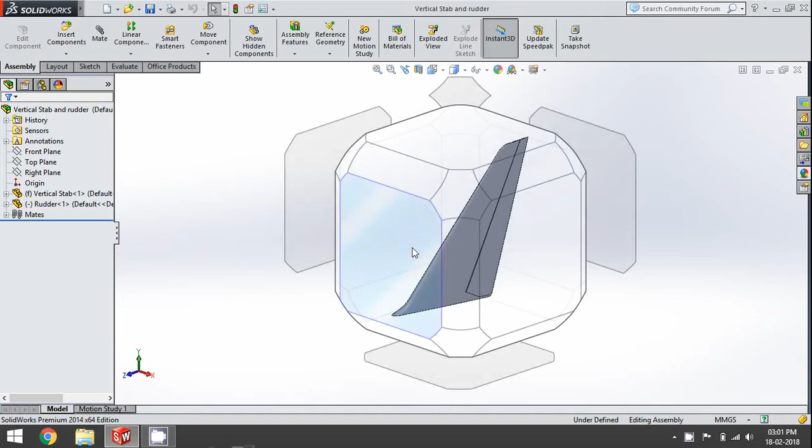Hello guys, in this video let's talk about how to make the control surfaces of an aircraft. For this video I'm gonna use the vertical stabilizer and rudder assembly to show you how to make the control surface. And the reason why I'm using this particular control surface here is because it is the simplest, as it doesn't follow any complicated profile since it's a vertical profile. And that's pretty much it.

And all the other control surfaces, like on the wing or on the elevator or anywhere else on the aircraft, can be made by the same method that we use here. Usually the problem with making control surfaces is that we won't be able to get a perfectly lined up seam at the point where the rudder or the control surface actually meets the parent surface of the aircraft.

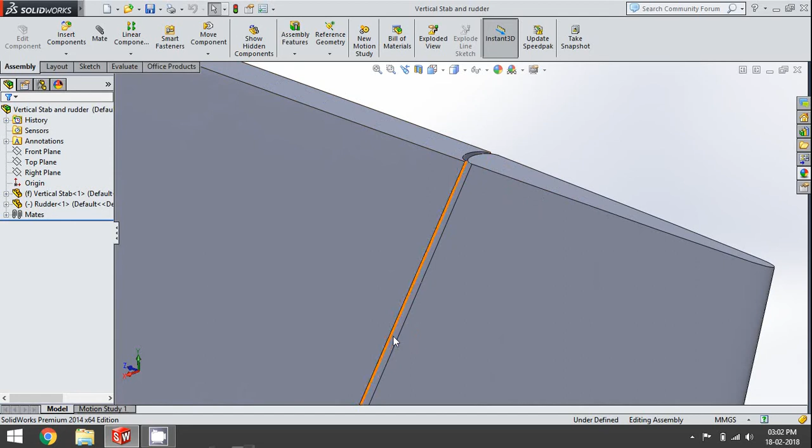So as you can see here, the seam throughout the control surface is almost perfect. It is not changing, or it is not having big gaps or anything in between there. And also, as you can see, when I move the control surface, the seam pretty much stays the same. So let's see how we can make this.

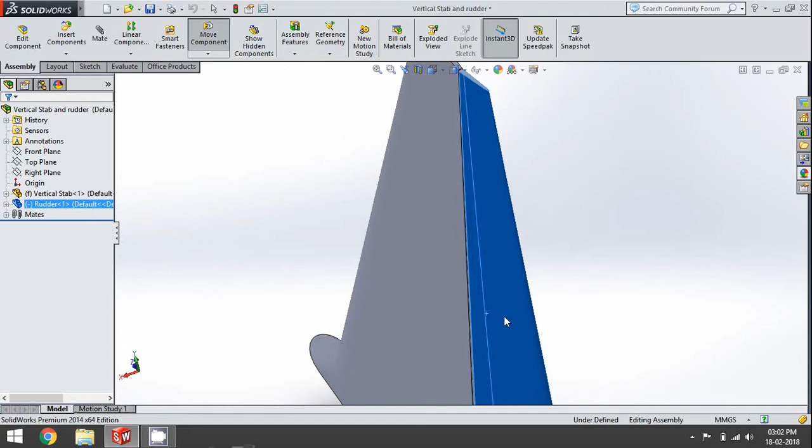So I have already made the vertical stab over here, and before you do anything to this part, make sure that you make another copy of this vertical stab, the exact copy of this part. So I made an exact copy and I named it rudder, and this is what I've opened in SolidWorks right now. So the first thing that we have to do is sketch out the portion that we have to cut out of this vertical stab.

For that, I have taken a picture of the A380 as a reference. So as you can see, the rudder itself is divided into two parts, but we're not going to do that. We're just going to make the rudder as a single part. So the profile comes from here, it goes straight down, but it does not go to the fuselage itself. It stops kind of like 2 feet away from the fuselage, or 1 foot, I'm not sure, and it makes an angle as it goes down and meets the fuselage.

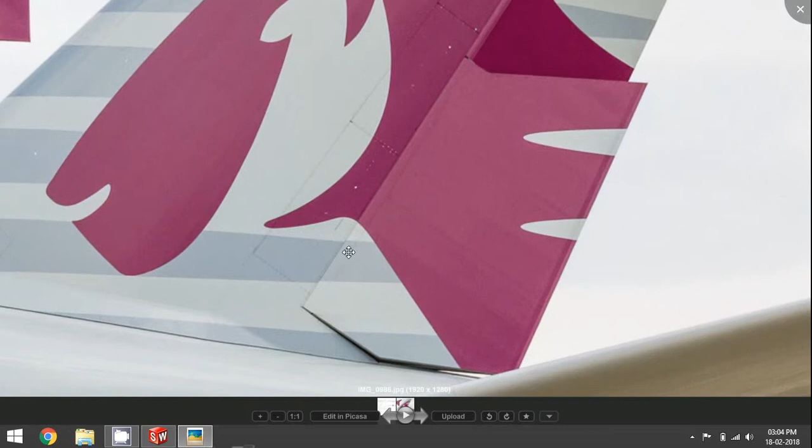And note the other thing here, the angle that this line and this line make is 90 degrees. That means we can say that this line over here or somewhere in there is the pivot point. So we're gonna do that right now. So we are gonna sketch an image over here as a reference for cutting the rudder off.

And there you go. I have already sketched out the part that we have to cut, and we can see that I have made a sketch throughout the entire part, and also a sketch that kind of shows us where the rudder is going to be. So this portion is going to be the rudder, and this is going to be the vertical stab. And make sure you draw both these sections in this one sketch itself, because we will need it for the other part too.

And before you do any cutting or anything, let's do a small thing here. Remember the thing that I talked about, the seam gap being even throughout the rudder, and that is because I made a small gap over here when I made the cut. And since the vertical stab's thickness increases as we go down from the top, we have to make the clearance from there to here in an increasing manner. So there should be a gradient as we go down. So this is kind of like a trial and error method.

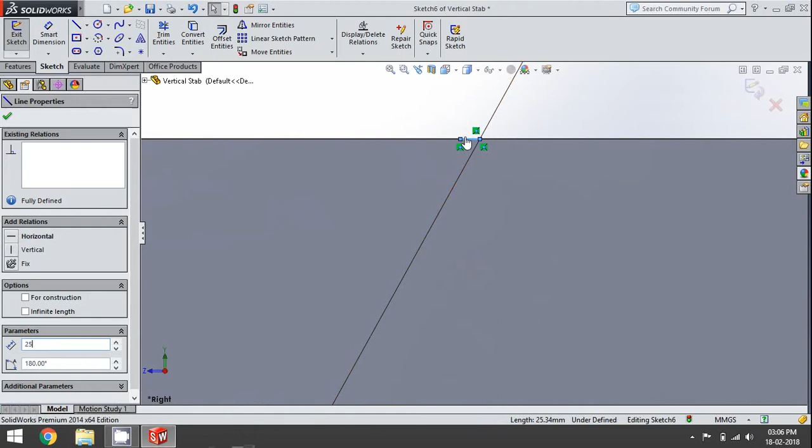So what I did is I made a small line over here that is about 25 millimeters long, and also a line here which is parallel to this line, and that line is about 100 millimeters long. And then I used this to connect this point and continue that line to here. So now we can make this a construction line, and there you go.

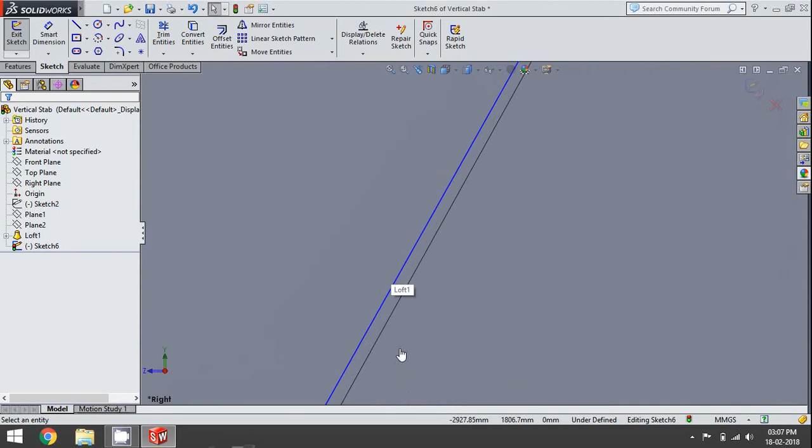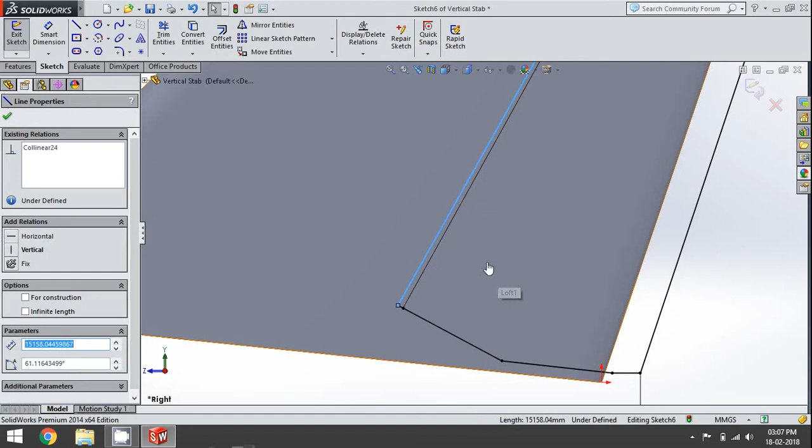So we have two lines here, the line for the gradient and this line as the pivot point, and make sure that the pivot line is always perpendicular to this line, so when the rudder rotates, it's not gonna make an angle with this whole vertical stab section. So now we're gonna use the gradient line to cut off the rudder from the vertical stab section. To do that, we just have to make this the construction line, and then we are good to go.

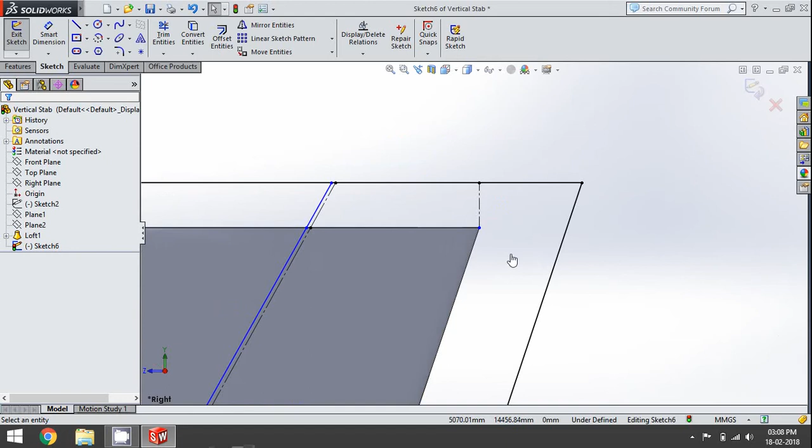Also, you can see that I made a small line here that is coinciding with the point on the very far end of the vertical stab. That is just for reference, so that when you copy this same sketch to the other file, we won't be misaligned. So let's see what's gonna happen. I'm just gonna cut it out, and I want this section to be cut out. So I'm just clicking that, and then through all. Okay, there we go.

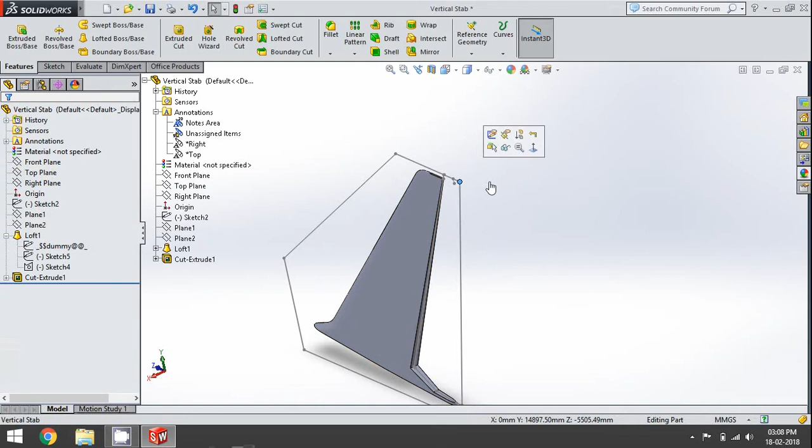So the entire rudder portion that we are gonna fix into the vertical stab is cut off. Let's hide this sketch. Now what we have to do is we have to make a pivot point there. Remember, we made a 100mm gap from this line to the pivot point, which was somewhere over there. If you take this sketch, you can see that the pivot point is here, which is not falling on this line here, but we use this section, this line, for cutting off the rudder.

So we are going to make the pivot point on this point, and before that we should make a semicircular lofted cut inside this part, so that when the rudder is fixed in there, it kind of fits in nicely and evenly without any interferences. So at first let's make that lofted cut. So for that, I'm going to start a sketch on this

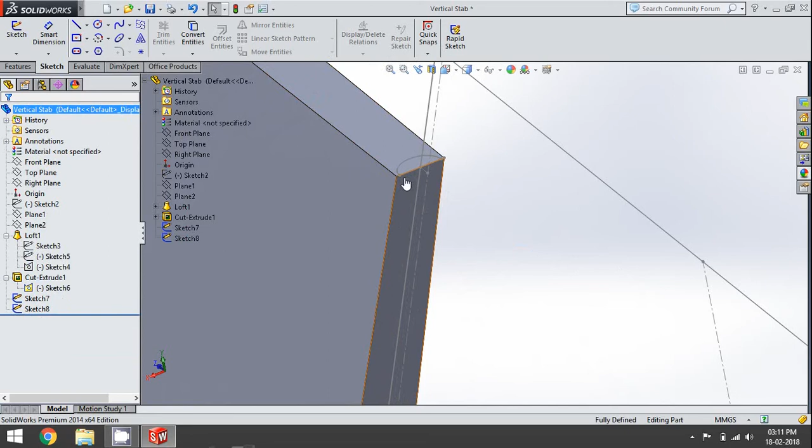plane. So I have already made the two profiles here at the bottom and at the top on this plane, and now I have to make two guide curves. So you cannot use any plane like the right plane for the guide curves, because this point and this point are in two different planes. So the lines that connect these 2 points are going to be a 3D sketch.

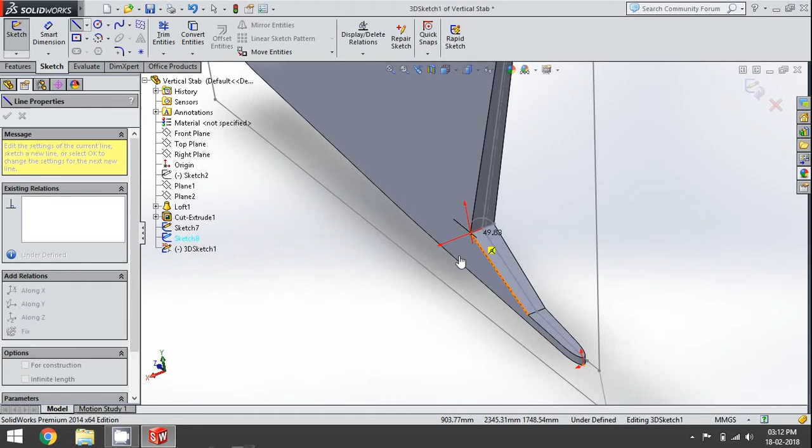So I'm just going to use the 3D sketch here, the line function, and I'm just simply going to connect those 2 points with the sketch tool here. So that point and this point over there we go. We have the first guide curve. I'm going to do that on the other side too. And there we go. We have the second guide curve ready.

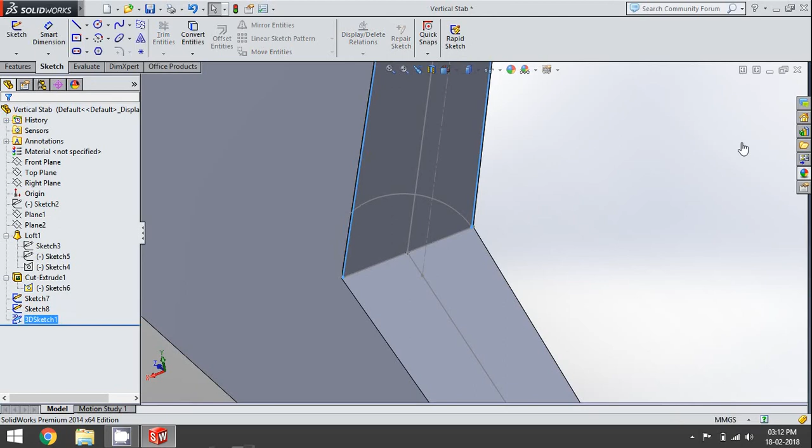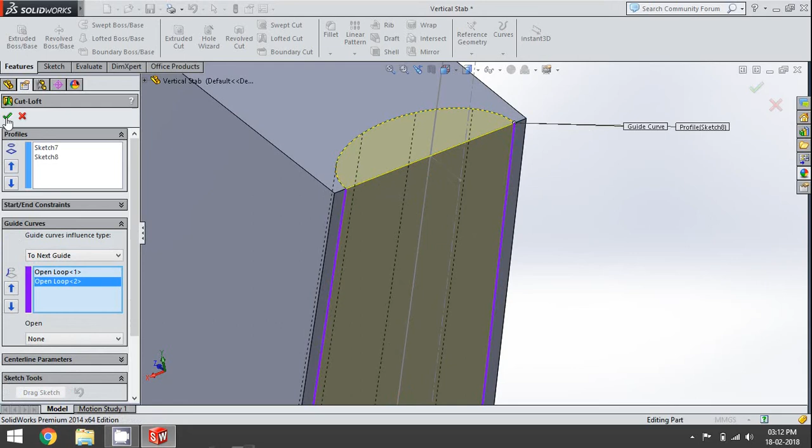Now we can do the lofted cut. So features, lofted cut, select the two profiles. Oops. The two profiles, the guide curves, and there you go. The loft is cut out, and now we have to make a pivot point. So remember, we agreed on using this point over here because this is the pivot line. So we're gonna make a small circular boss there.

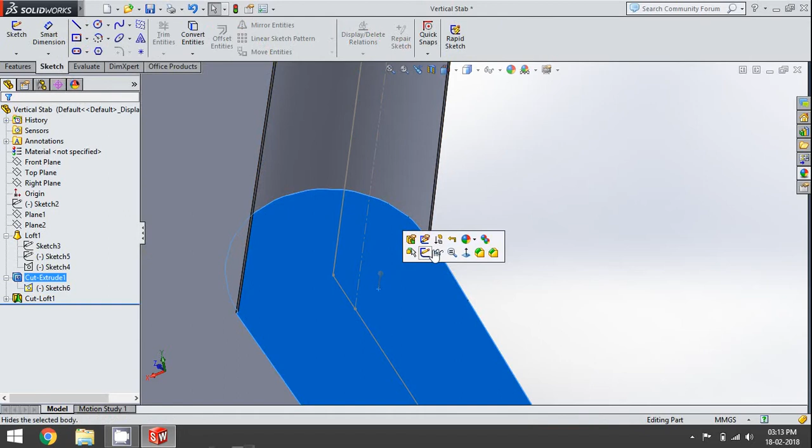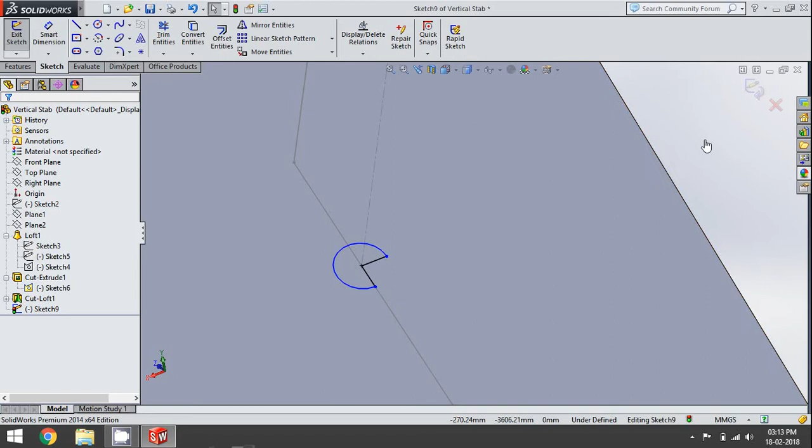Sketch, say 20mm. So it's better you cut out a quadrant before you do the boss base. This is not the way you do it in the real world. This is just for show. This has nothing to do with engineering. So I'll show you why I do that. So cut a quadrant there, and then we're gonna extrude it. So say 50 millimeters. There we go.

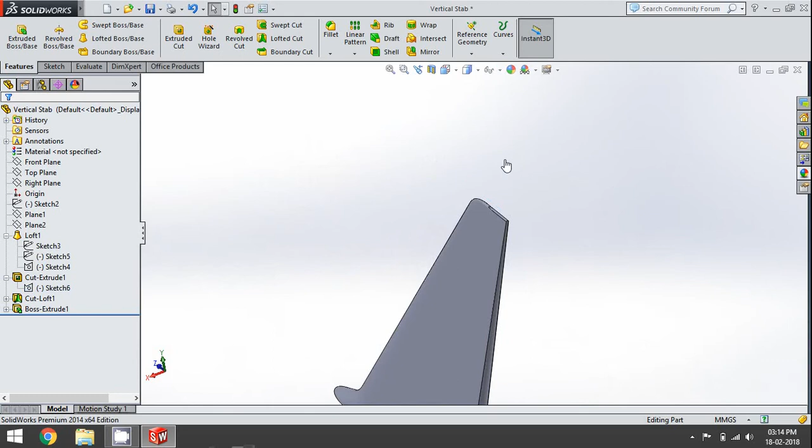And that's all that we have to do on the vertical stab. So save it, and we can close it. So before we close it, copy that. So we have that copied and close it. Now open the rudder file.

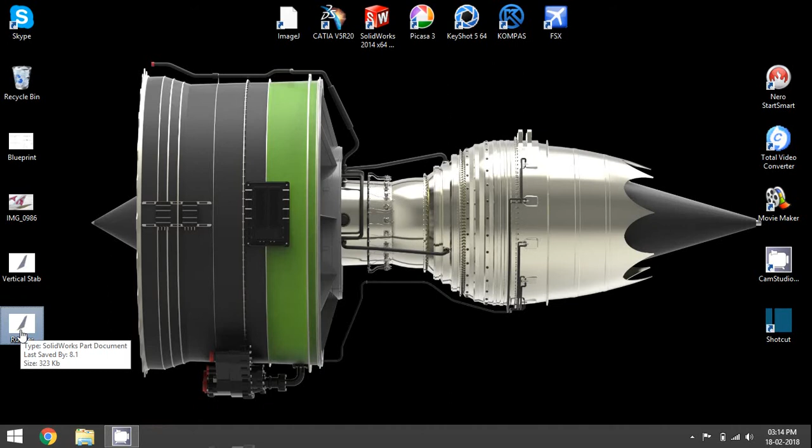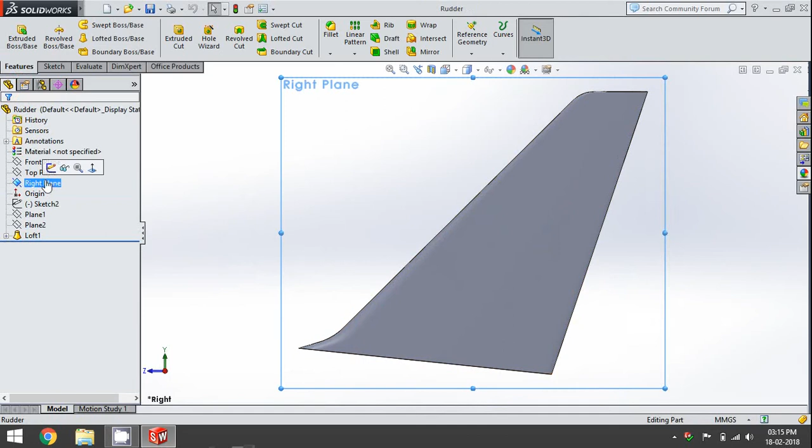So here we are gonna do the same thing, but we are gonna cut out the second portion, not the portion that we already cut out in the vertical stab file. We're gonna cut out the rest of the area. So we're gonna make a sketch on the right plane, and we have already copied the image, so paste it here, and we already agreed that this point is going to be the reference point, and that is gonna line up with this point over here, this very end. So we're going to use the convert entities to identify that line.

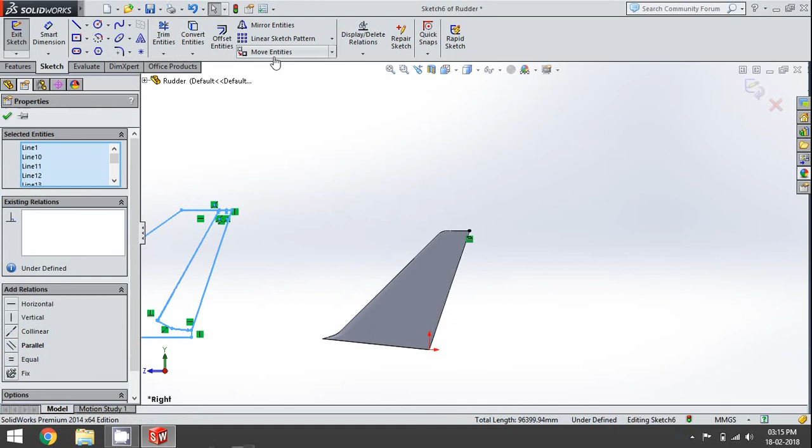So we have that point there. Now control, oops, I just missed it. So convert entities, control A, unselect that, and move entities, select this point here, and make it coincide with this very end. There we go. We have everything perfectly lined up.

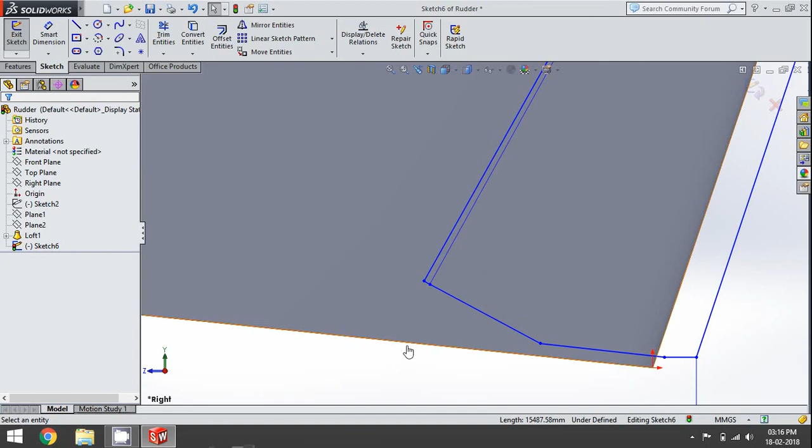Okay, so here in the previous file we used this line for cutting, but in this file we're going to use the pivot line itself for cutting, and I'll show you what's going to happen there. So we're going to convert this from a construction line into a solid line, and we're gonna convert all the other lines into a construction line. So this is a construction line now, and this one too. There we go, everything is all done.

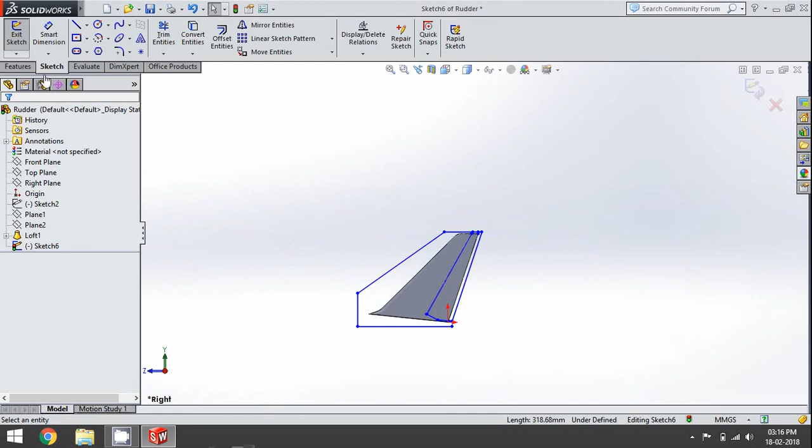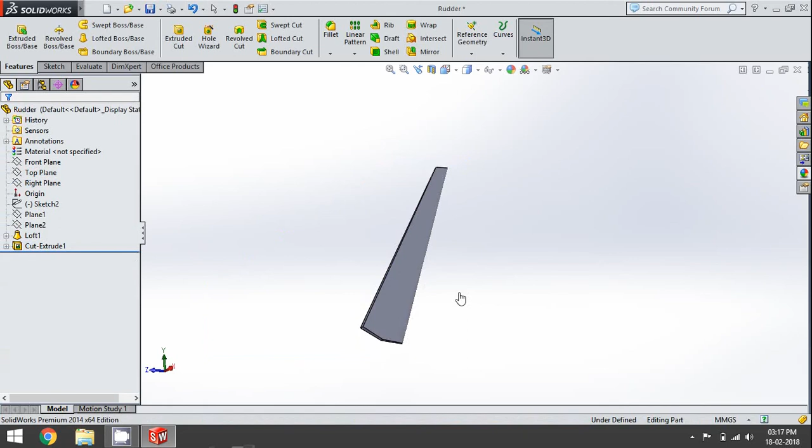Now we can just use the cut function to cut it out. So earlier we used this profile to cut out everything, and now we're going to use this one because we don't need this anymore. We need this section here, so we're going to cut out this. Through all, both, and there we go. So we have the rudder section that is ready, but again we have to do a little bit of construction or lofting over here.

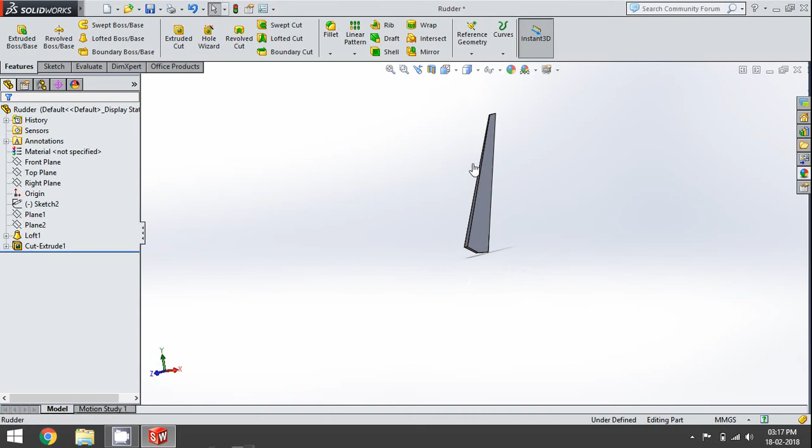So remember we made a lofted cut on the very end side of the cut on the vertical stab. So here we are going to do the opposite of that. We are going to make a loft on this very plane over here. So let's start with the sketches. So we have all the sketches and profiles and guide curves, everything ready here. The guide curves again are a 3D sketch, it's not a 2D sketch. So now we're just going to loft it.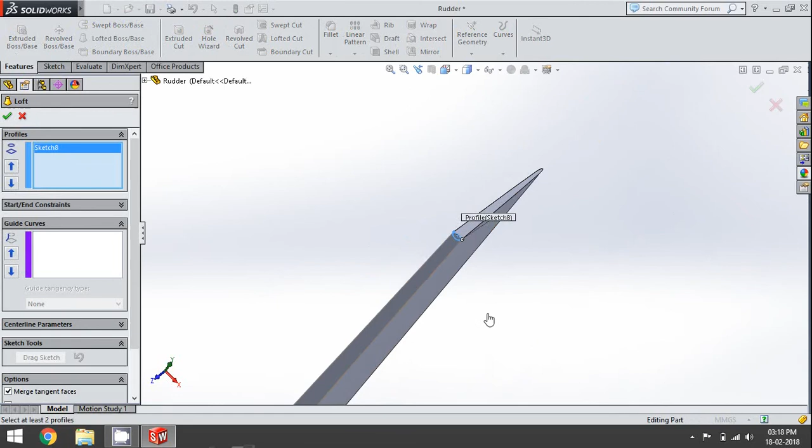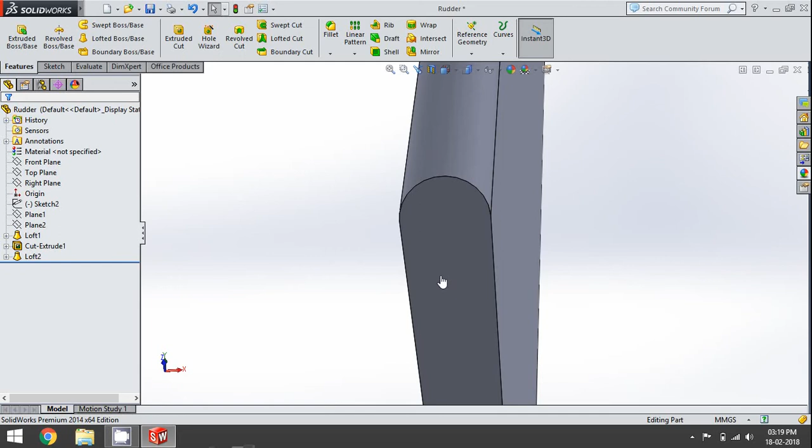There you go, the loft is ready, and now we have to make the pivot that is on the bottom here. So when we made the pivot on the vertical stab, remember we made a 100 millimeter clearance from the face of the cut. But here, since we made the cut on that pivot point, we are going to use that as the reference, using that very point where we finish the cut as the line where we're going to use the pivot point.

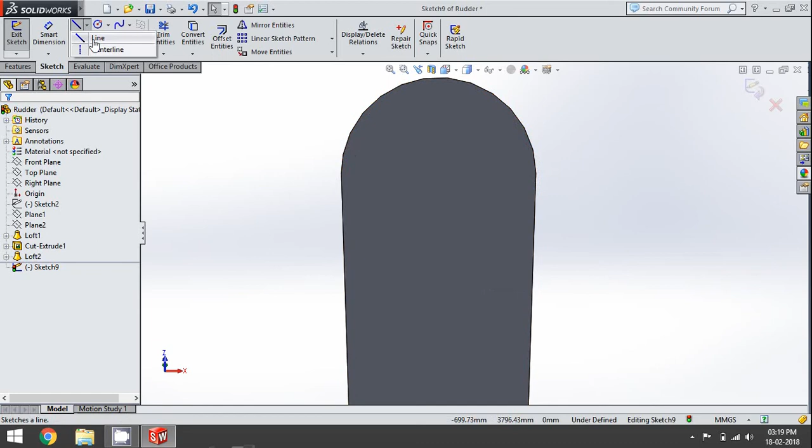So we know that this whole profile here, this whole edge that you see, is the loft. So the sketch was ended, or the part was cut from this point to this point over here, so that's where our pivot is going to be. That line is where the pivot point is going to be. So the middle of this line, again 20 millimeters.

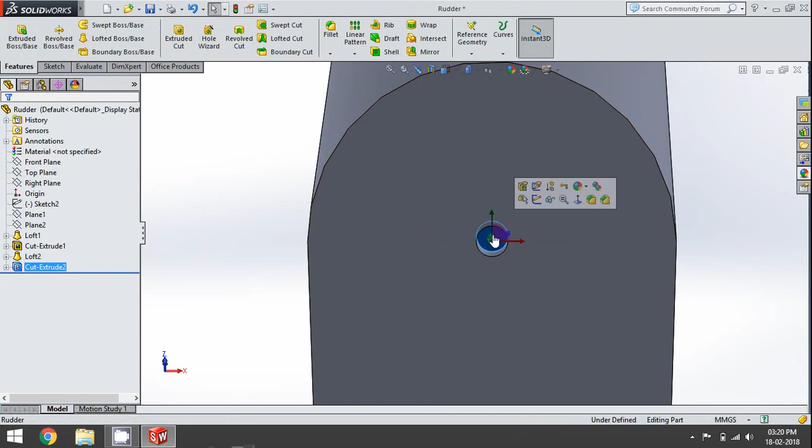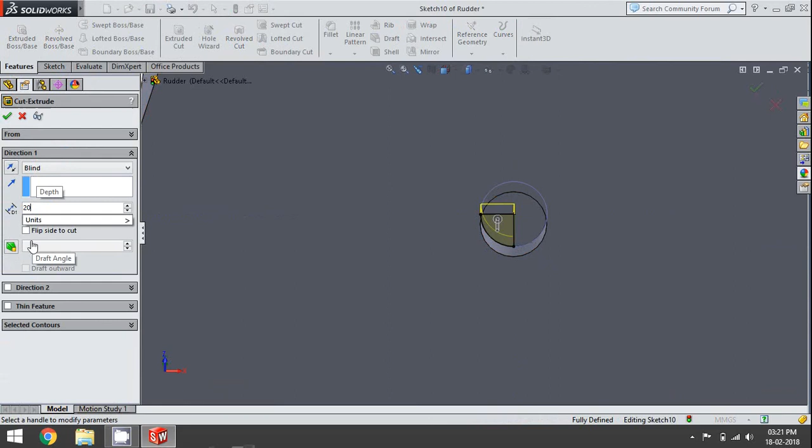And remember we made a quadrant, just gonna cut it and then make the quadrant over that. Extrude cut, go in 50, and then on another sketch here we are gonna make the quadrant. So the quadrant is here, and trim the other out. Oops, cut, extrude - we don't need 50, like 20 would do. And there you go, that is done.

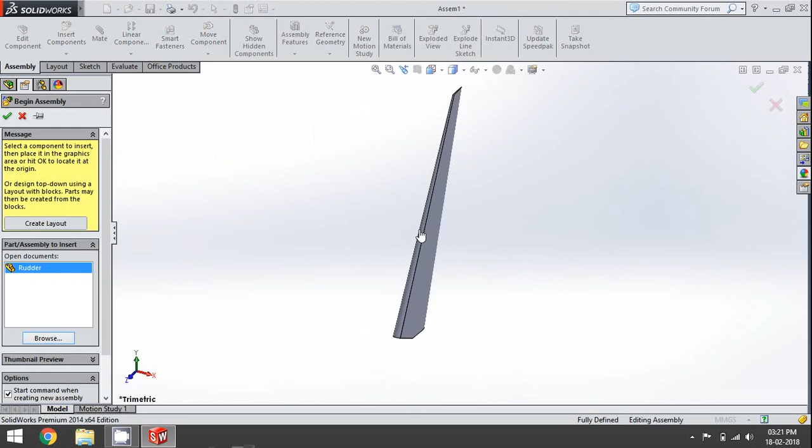So the rudder and the vertical stab are done. So now let's assemble it. For that, open an assembly, browse - so we have rudder, and we have the vertical stab.

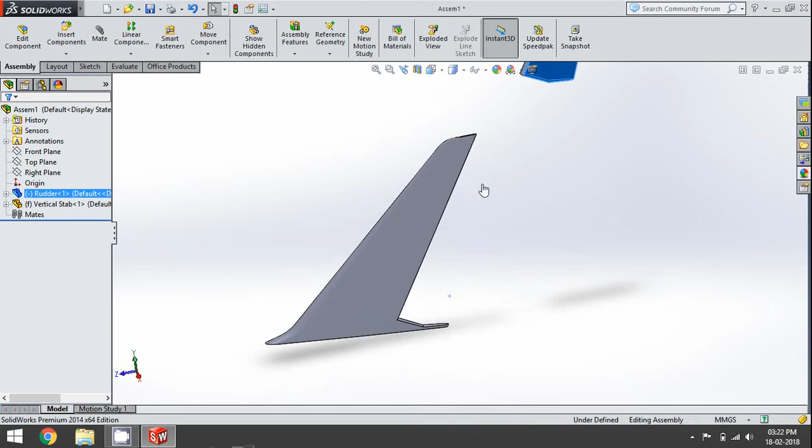So I'm gonna fix this vertical stab first. So that is fixed, and that is floating. Now we have to line up these two pivot points, so we have to mate that cylindrical surface to the cylindrical surface that we created on the rudder. It's going to be a concentric mate, so that it is perfectly lined up.

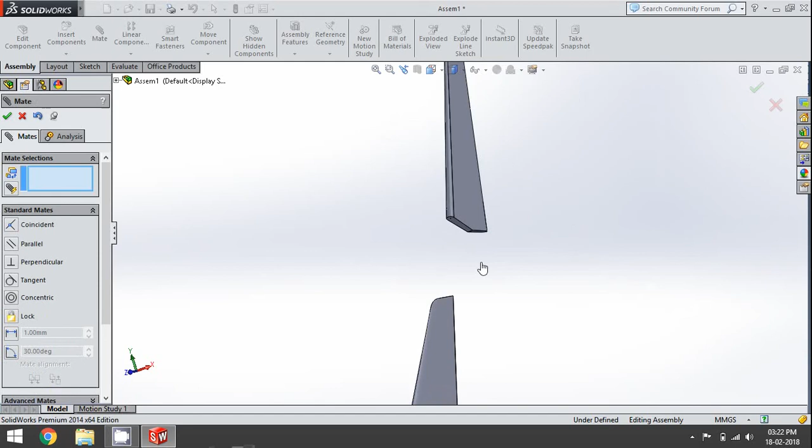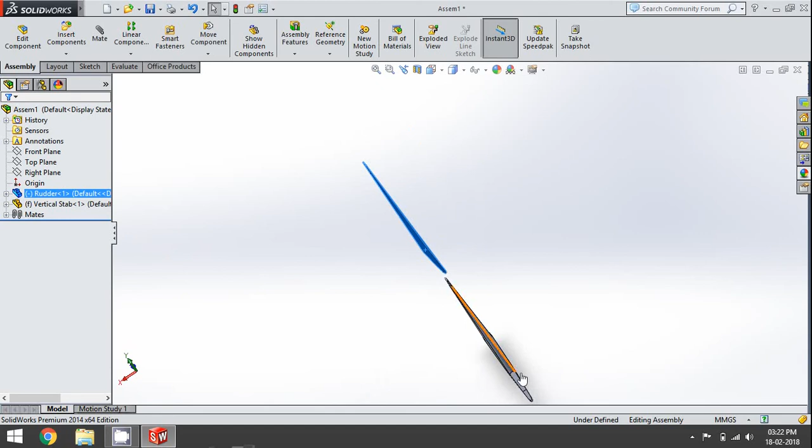And now we know that the rudder doesn't go like this on an aircraft - it always stops at a particular angle. So say let's put an angle constraint of 30 degrees to one side and 30 degrees to the other side. To do that, we are going to make use of the quadrants that we cut out, referencing this plane over there, or that surface over there, and that surface over there for the constraints.

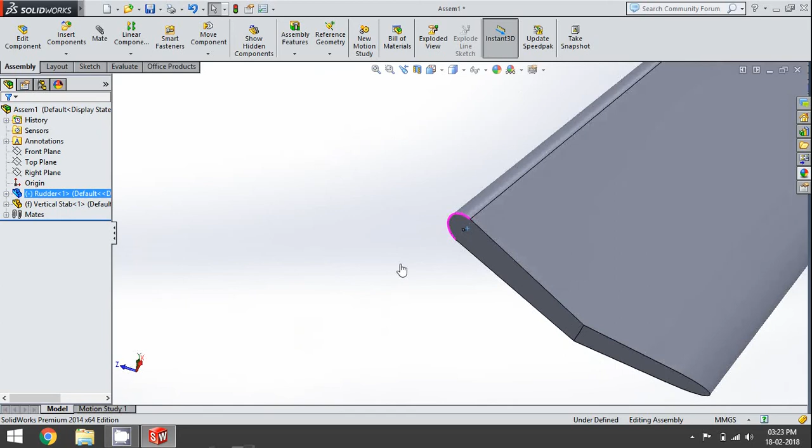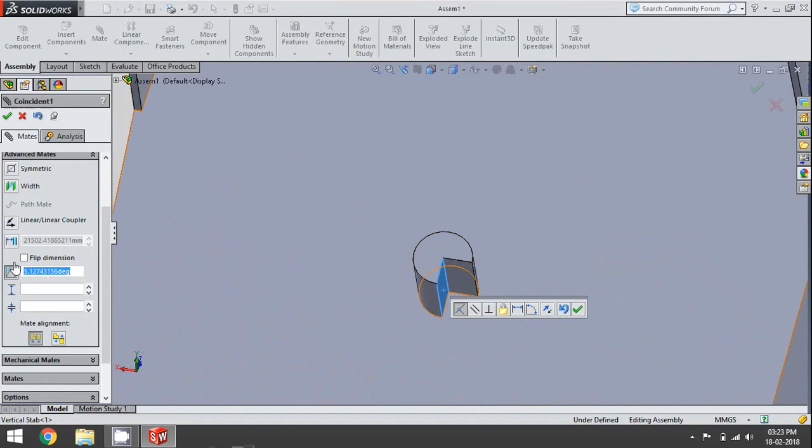So again, take mate - that surface on this rudder portion is already selected, and we're gonna use that surface on the vertical stab. Instead of going to standard mates, we're gonna use advanced mates and put an angle constraint over there. The maximum angle that it should go would be in this direction, let's say it is 30 degrees. The minimum angle is going to be on the negative side, because when these two planes are in the same plane, it is 0 degrees, and by the time it moves to this side it's positive, and to this side it's negative. So we're going to put the minimum as negative 30 here.

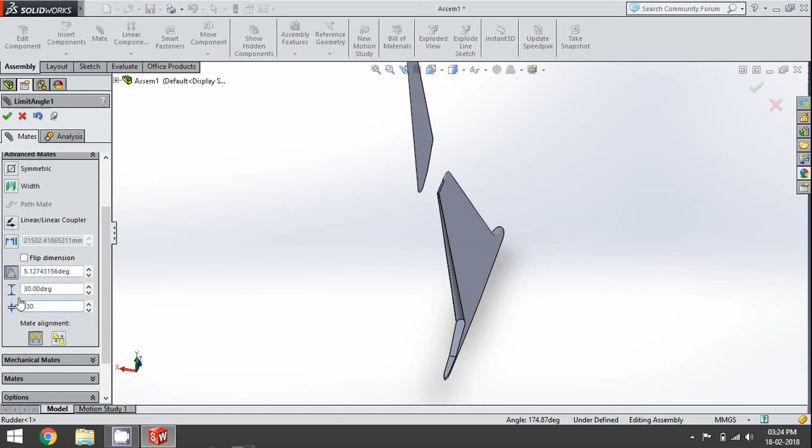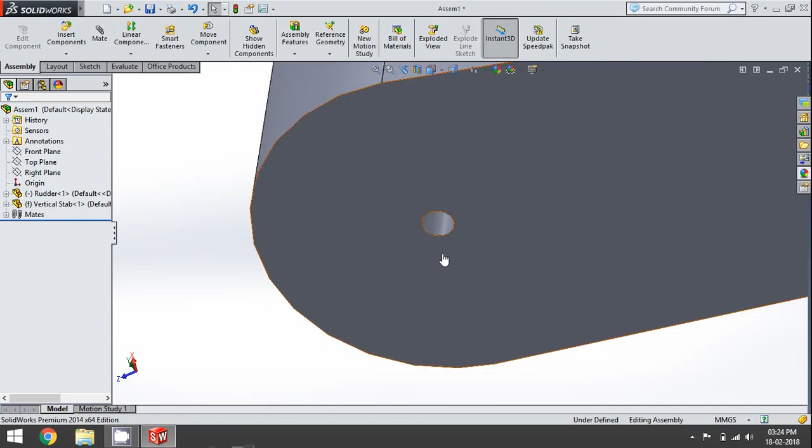So we have the constraints there. Let's give that the constraints. There you go, it is stopping there and it's stopping there, so the constraints are working. Now we have to bring that part down onto the vertical stab. For that, we're gonna select the mate and this face, and this face, coincident, and there you go. The mate is done and it is complete.

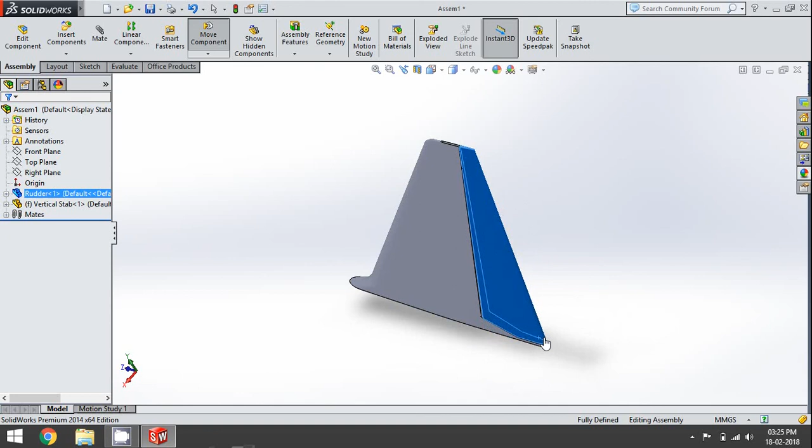The rudder and vertical stab assembly is complete. So there you go, the constraints are working - it is not going to go farther than 30 degrees on either side of the vertical stab. This is purely dependent on the aircraft. I don't know what is the angle for any aircraft - maybe if you do some research, you can find it online.

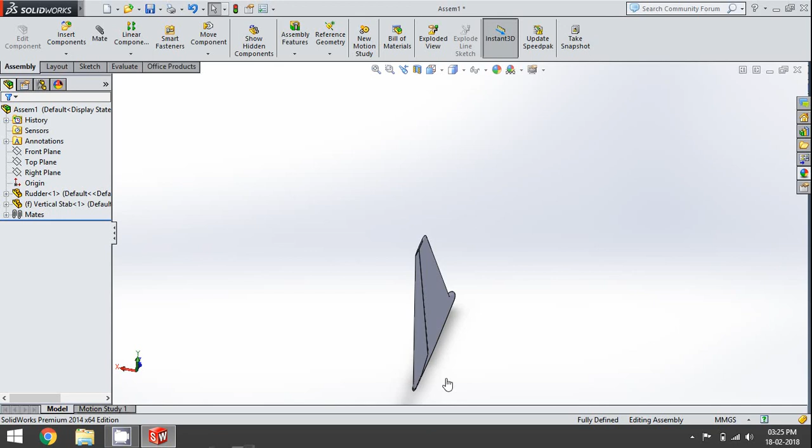So this is basically the way how we do the control surfaces on any aircraft control surface. This can be done on the aileron too. The only problem is that the aileron has a curved profile, or a little bit 3D curved profile, so you might want to be careful when you do the pivot, when you find the pivot line. Make sure that the pivot line is always perpendicular to the line that we cut on the wing or on the surface, because otherwise we won't get a perfect lineup.

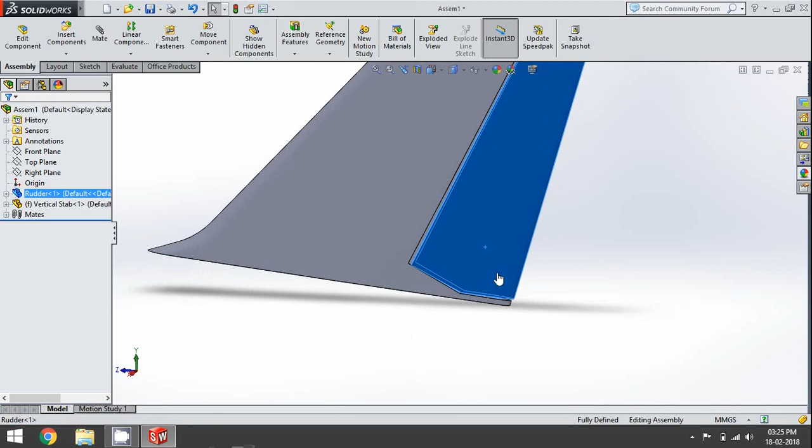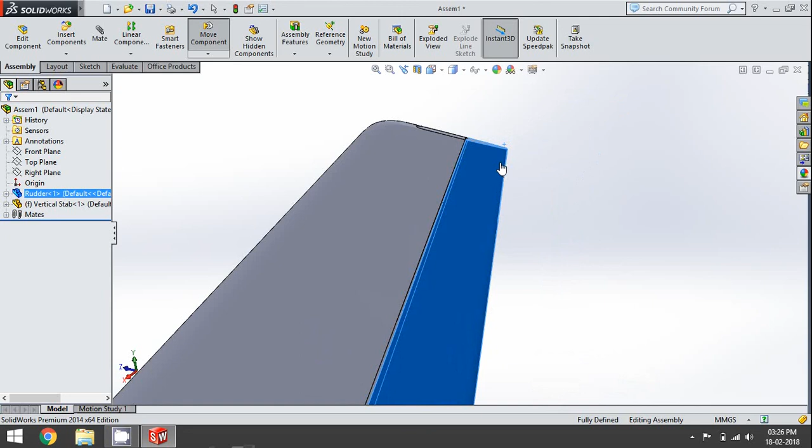As you can see here, since the pivot line is perpendicular, even though I move it left and right, it is going to line up perfectly with this base. But if you look at the top, it is not perpendicular, so it is going up and down as I move it from side to side - going up and perfectly straight, then up again. But that doesn't matter as long as anything is not touching on the control surface - that is perfectly fine.

So that is how you make any control surface on an aircraft.